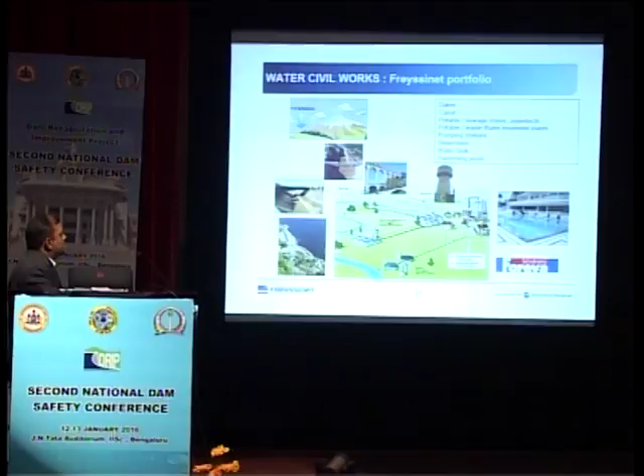Actually, we do a lot of civil works starting from dam, canal, then potable sewage mains, aqueducts, pumping stations, reservoirs, and also water tank and swimming pools.

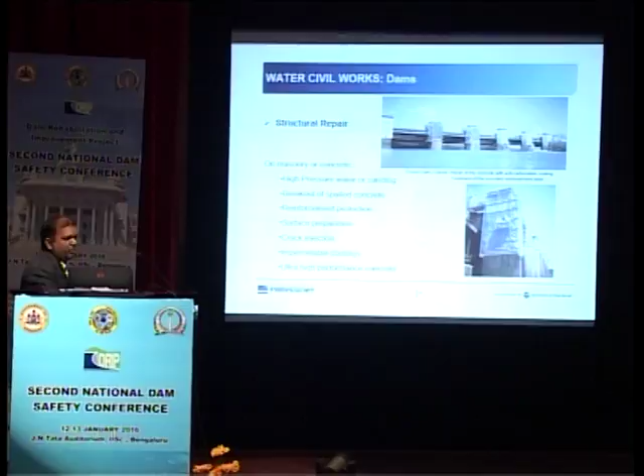So this is on structural strengthening. The important element we carry out is a new technology, dry shotcrete. Normally we do wet shotcreting in most projects, but we are introducing dry shotcrete for different needs, and also the application of carbon fiber reinforcement and jacking of dams.

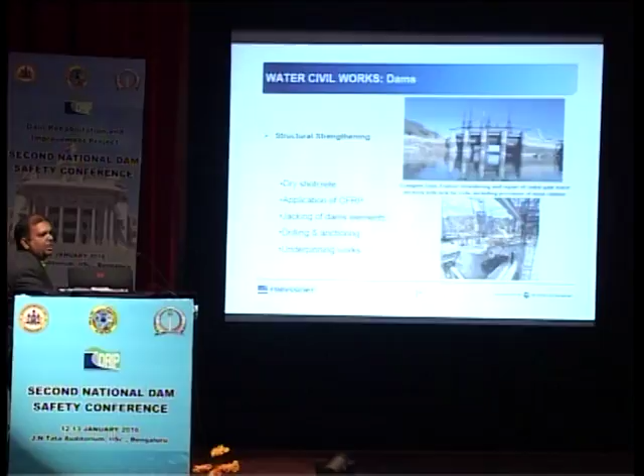Heavy elements could be jacked in the dams, like we precast elements outside, and that could be jacked using hydraulic equipment, and fitted onto the jacks in dams. And also we do underpinning works.

In upgrading of concrete structures, normally we precast large elements outside the dam, and also can do pre-stressing works, that is external pre-stressing, or sometimes a ground anchor, just to increase the strength of the concrete. This technique could be used even to increase the crest height of the dam.

This is one of the specialities, and we use hydraulic jacks to handle the precast elements. You can see here we got a frame, and using this frame, this element is precast outside, and this is being lowered.

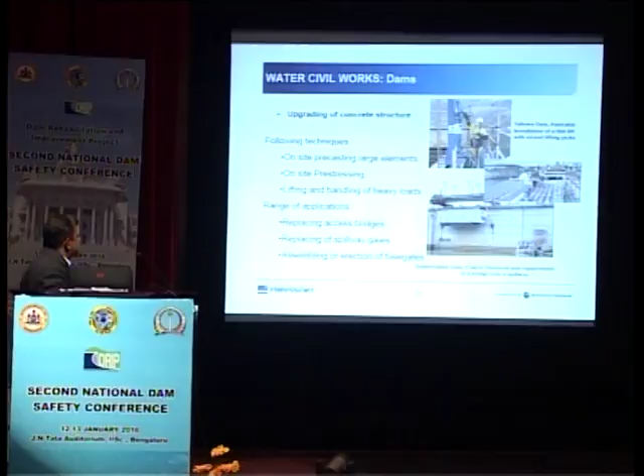We also do replacing access bridges, replacing of spillway gates, and assembling erection of fuse gates. Globally, we have done more than 30 dams all around the world, so we have a good level of experience in various aspects.

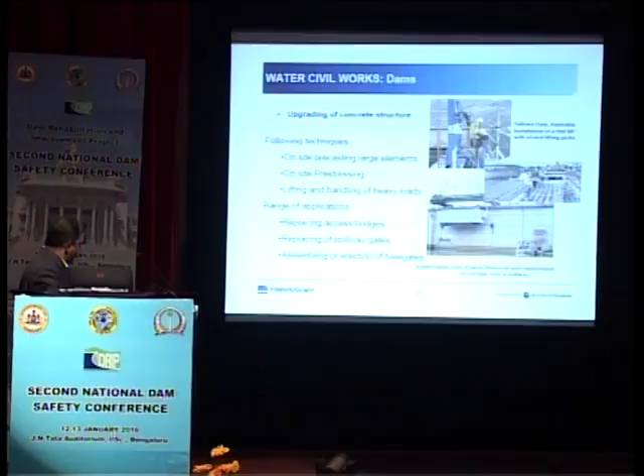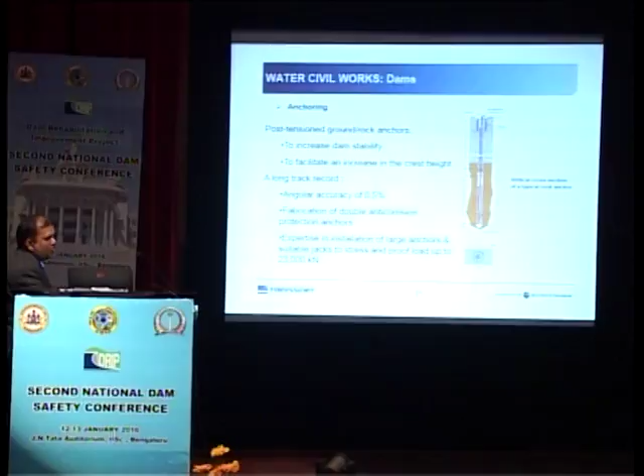This is one of the important credentials of Freyssinet, where we do the anchoring works. Using this technique, we can increase the height of the dam. So even for Narmada Dam, this can be one potential technique to increase the height.

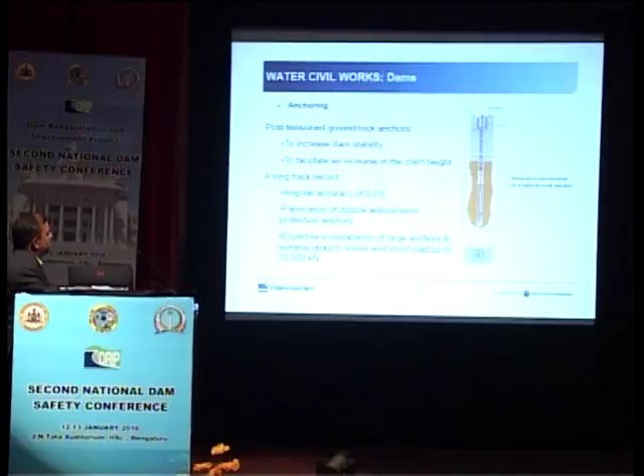What we do here basically helps us increase the dam stability and also increase the crest height. The drilling is the major concern, where we have to maintain accuracy of 0.5. So the equipment we use matters a lot.

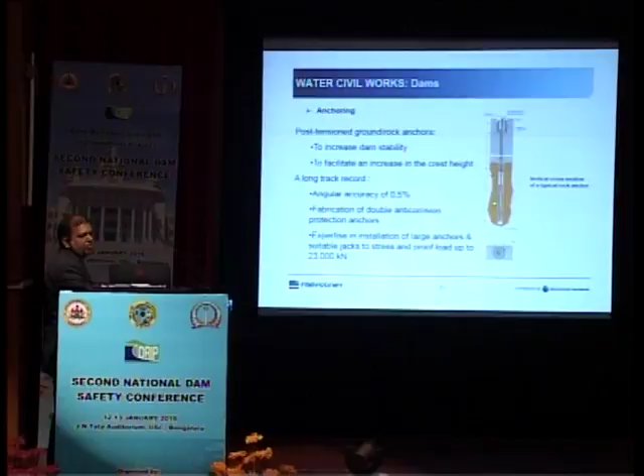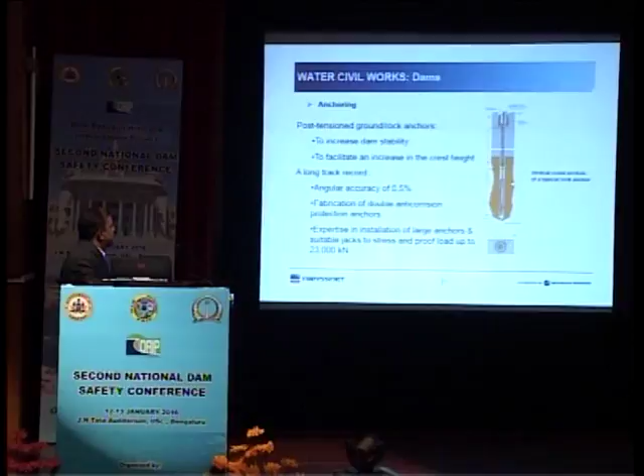Also the fabrication of corrosion protection, since there may be some leakages as it is a water structure, so we have to give emphasis on anti-corrosion measures. This is very, very important.

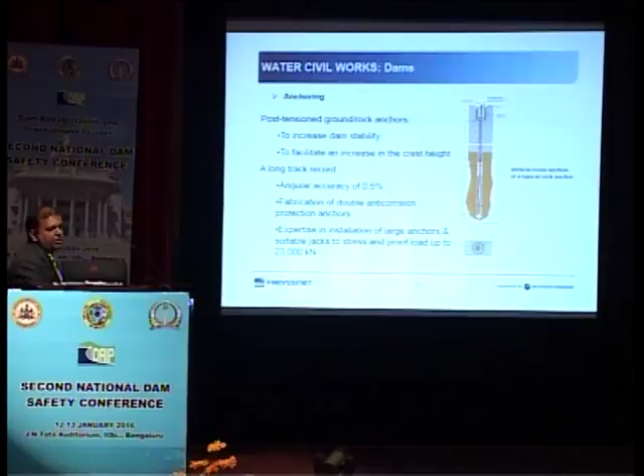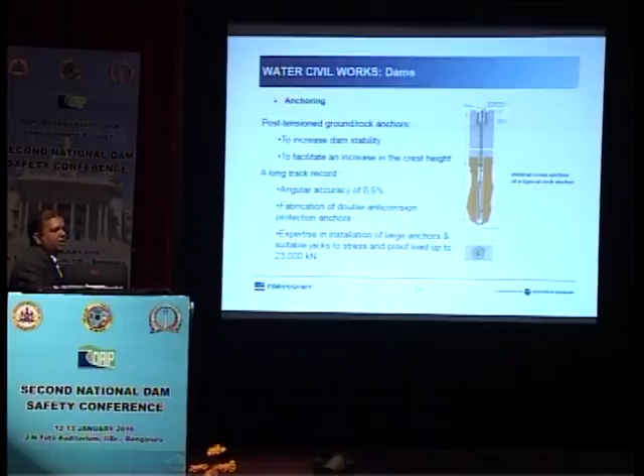We can do this ground anchor even up to 2,300 tons capacity per individual anchor. It's a huge anchor, requiring big machinery to handle. This is one of the important techniques adopted when we want to increase the height of the dam, and we have done more than 30 dams within 10 years, with vast experience in different fields.

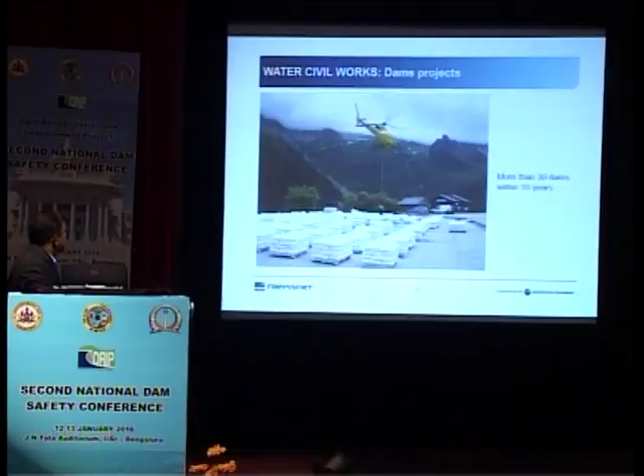Here mostly we wanted to emphasize the dry shotcrete technique. This is on masonry dam, where first we prepare the masonry dam using our hydro demolition machine. We have a specialized machine which works with high injection of water.

This prepares the surface using water. At around 2000 bar pressure, we can pump the water and clean the surface, giving a rough surface so that over that we can install the reinforcement, and over this we apply the dry shotcrete. Dry shotcrete can be prepared up to M60 or M70 strength, so greater strength.

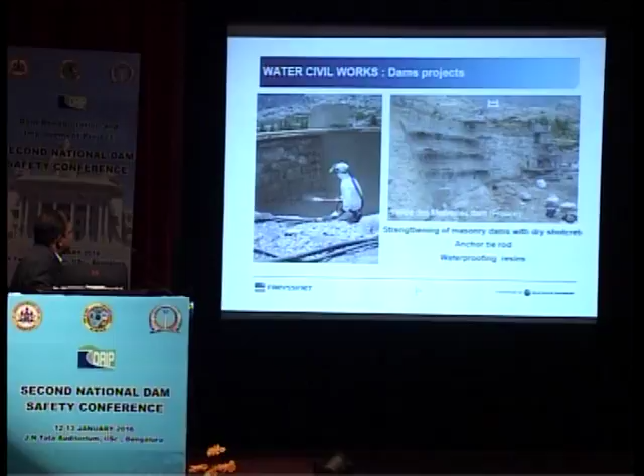In this strengthening, we can apply some tie rods also for holding arrangements, and waterproofing since we apply it. This is one dam in France, strengthening of concrete with dry shotcrete.

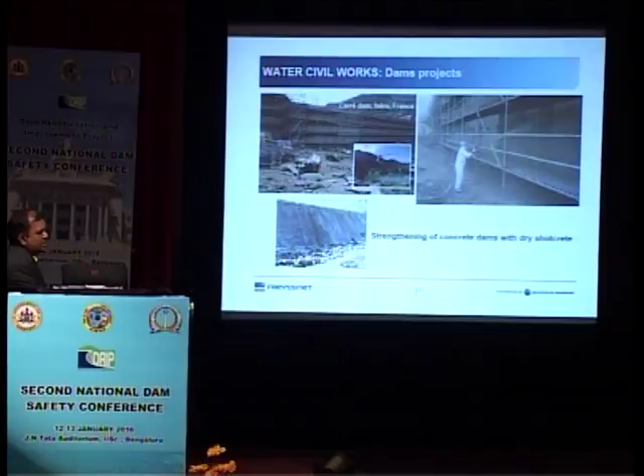Freyssinet extensively uses this dry shotcrete because of its strength, and also because of its monolithic structure. When we apply this dry shotcrete into the existing structure, it becomes a good binding, and also acts like a monolithic structure. We have proven this in several tests.

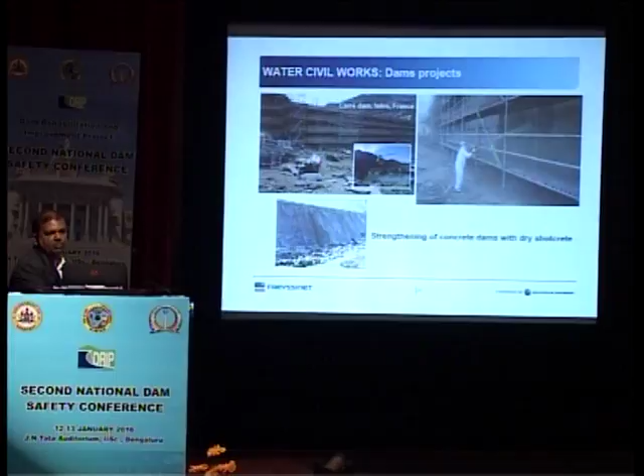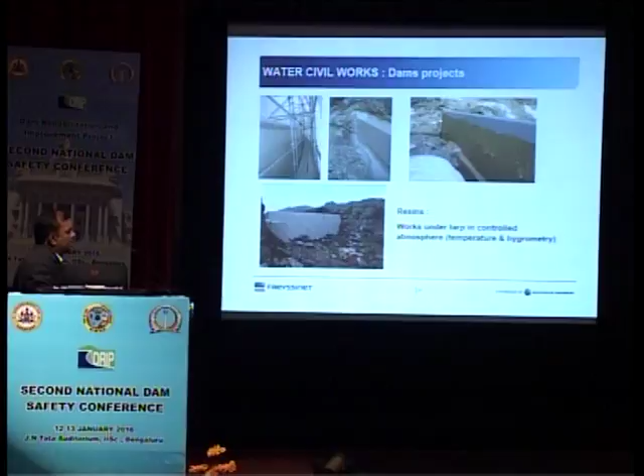These are all some resins under a controlled environment. It is important to work with resins under controlled temperature and also under a controlled environment.

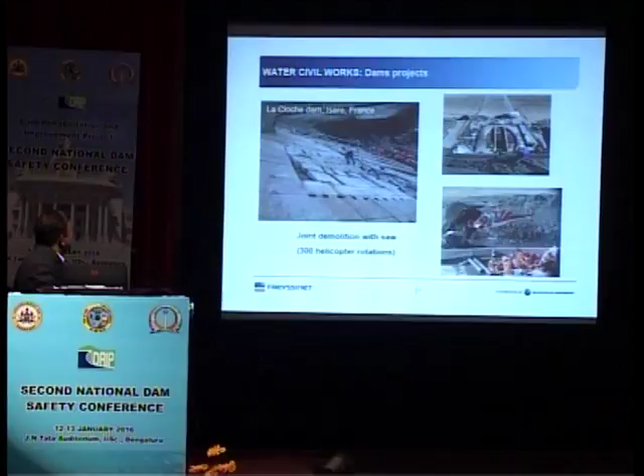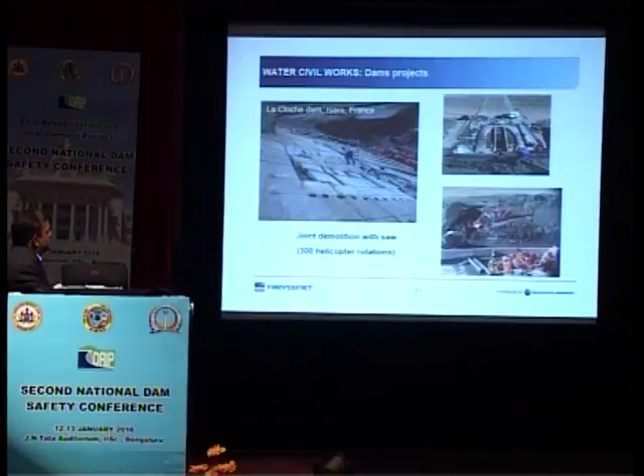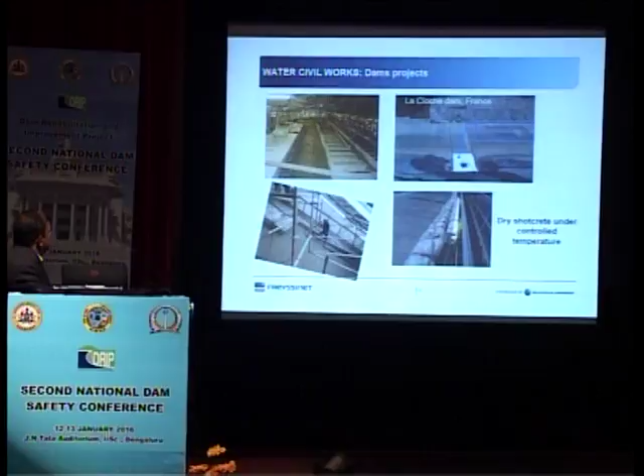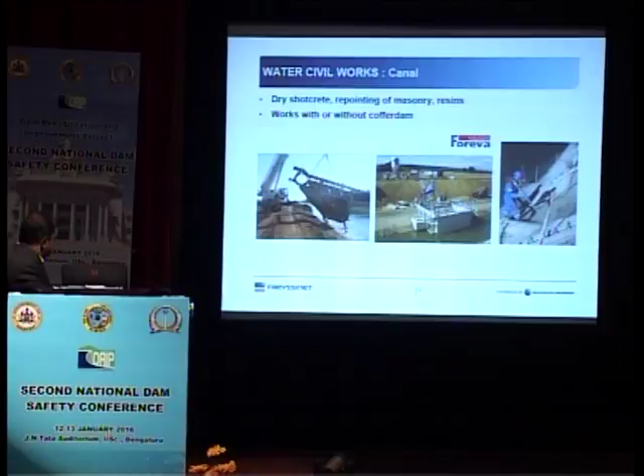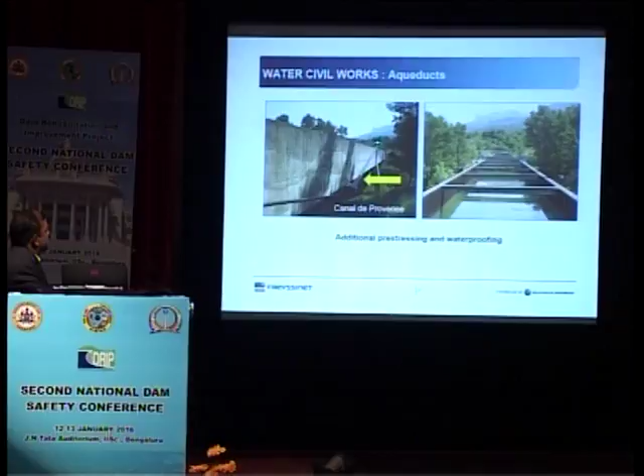So again, dry shotcrete has been used, under controlled temperature. Same project, this is for repointing of masonry and resins with or without cofferdam. These canals could be lined with this technique, and these are all some canal jobs which we did. For here we do some kind of additional pre-stressing external to the structure, and also waterproofing.

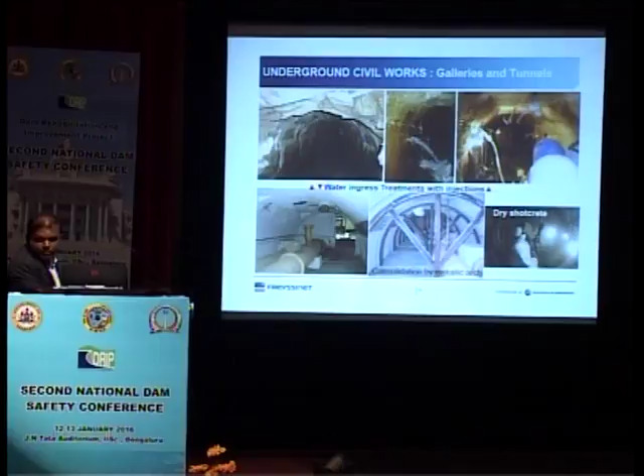This is one of the good examples again for dry shotcrete, a different technique inside the tunnel. The tunnel was earlier like this, then we used our frame system, first made a rough finish, and then applied this dry shotcrete concrete. This is one of the projects which we did in Bhutan.

So here again inside the tunnel we can do some kind of anchoring for strengthening purposes. It can be vertical upward anchoring. This is one of the very critical techniques to use, vertical upward anchoring with the combination of nails and also anchors.

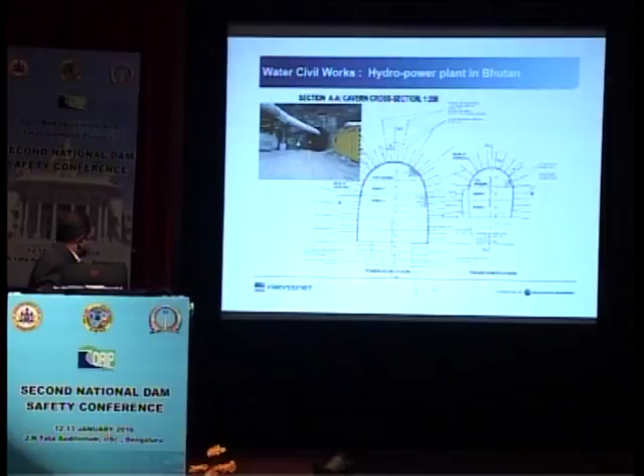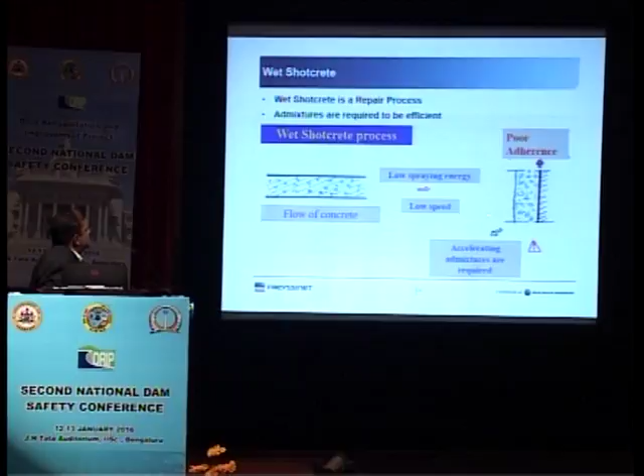In dry shotcrete, we have high spraying energy and high speed. So here if you see, the bonding between the original member and the applied shotcrete is very high. The bonding is high and it acts as a monolithic structure. This has been proven in various tests.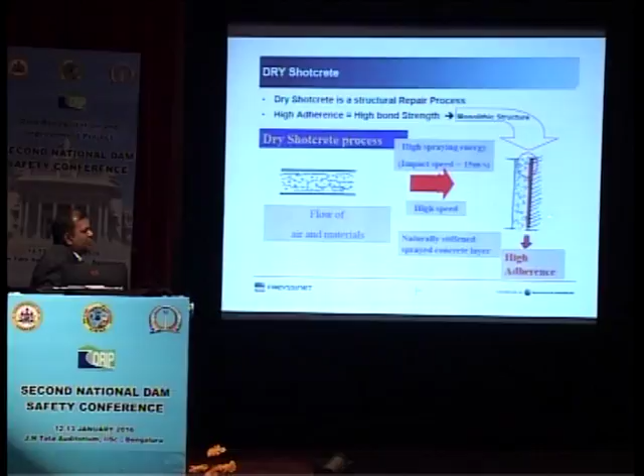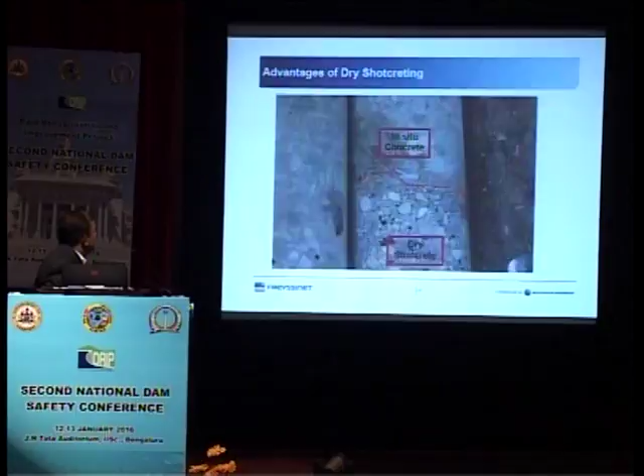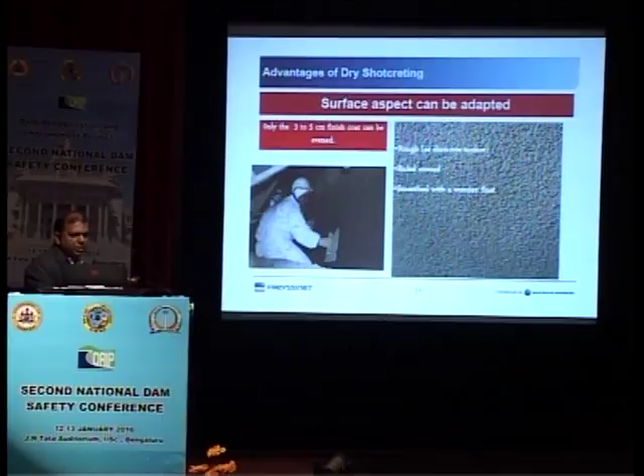I will shortly conclude. So this is on dry shotcrete, a very wonderful technique. Here we bring to the table mainly two or three techniques: one is dry shotcrete, the second is ground anchoring, and also hydro demolition technique. But there are various options. We can do it, but this is one of the options to improve the technique, and also we can do the combination of pre-stressing as well as ground anchor to improve the structure.

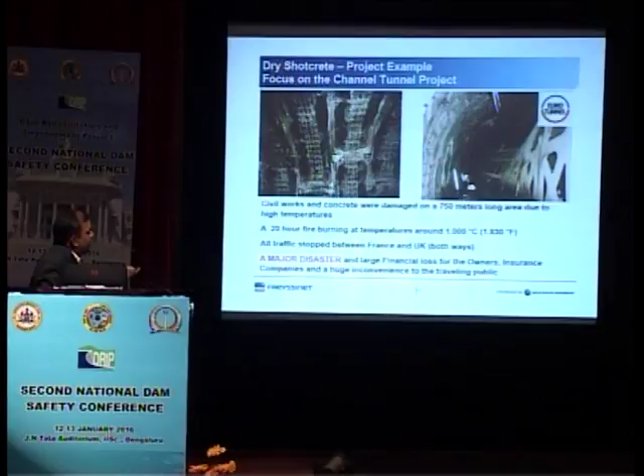So these are all some jobs which Freyssinet have done. This is one of the interesting jobs between France and... I think I would request you to kindly conclude because we are running short of time.

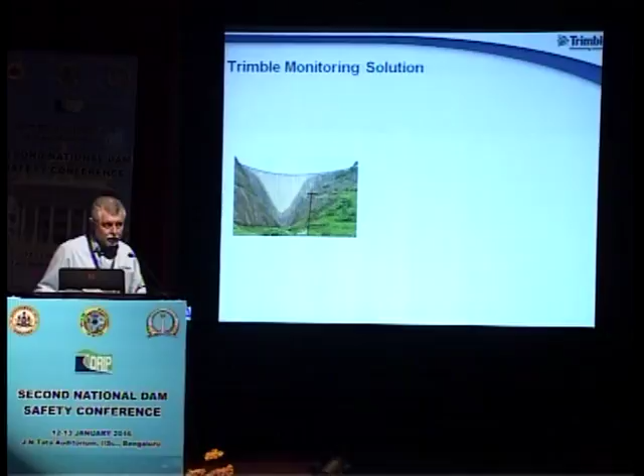It works as follows. We start with the dam, which is one of the structures we're going to be monitoring here in the DRIP project. We take the existing sensors which are on the dam already. Now all of the dams that we've looked at in the DRIP project so far have got sensors on them in various forms. We take those sensors and get them operational, and if necessary, we replace them.

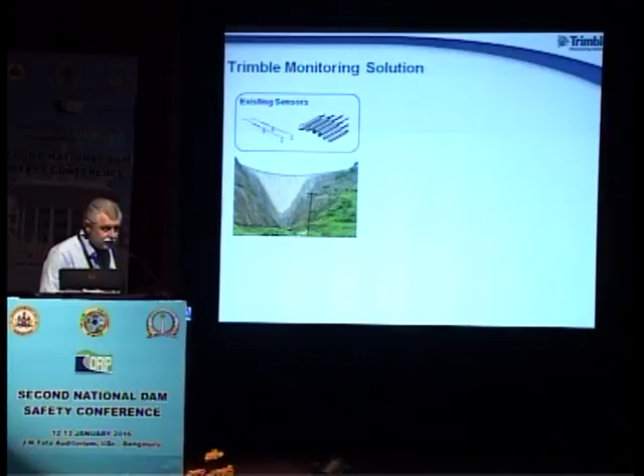If necessary, we just upgrade them. We can add new sensors to the dam. The typical sensors that we use here are GPS-based sensors, optical-based sensors, and seismic-based sensors, as well as data logger components which then are connected to geotechnical sensors.

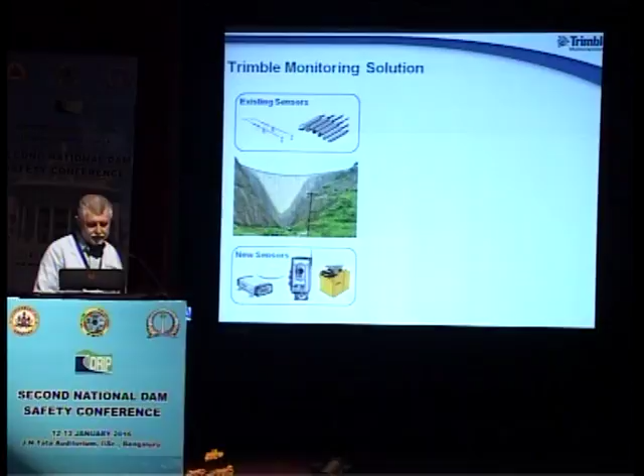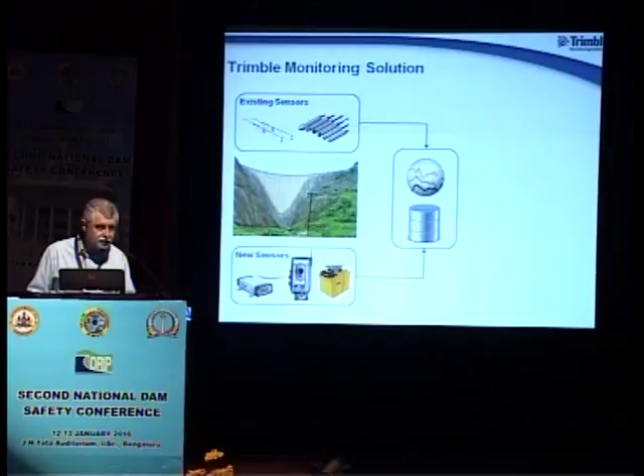So we take the existing sensors, we take the new sensors, we acquire the data from those, and we feed them into a software package. The software package has a SQL database in it, which is an open source database. The numeric processing that takes place in the background processes the data from the sensors, converts it into a data time stream, and feeds it into the database.

The information in that database is then available for analysis, alarming, and reporting through various forms. You can have it on your desktop, laptop, tablet, cell phone, etc. This is the overview of the basic system that we have, and we concentrate on measuring the performance of the dam.

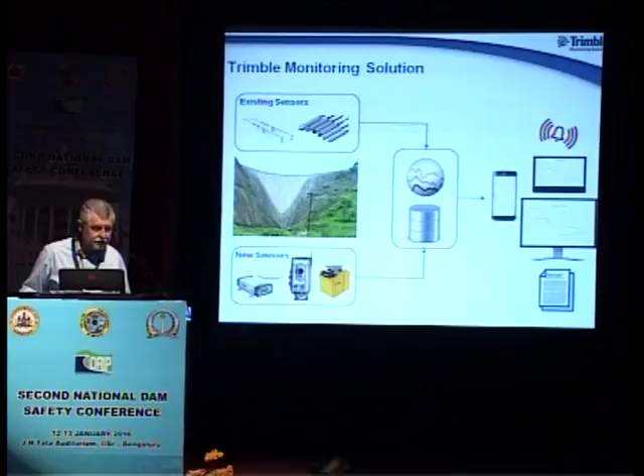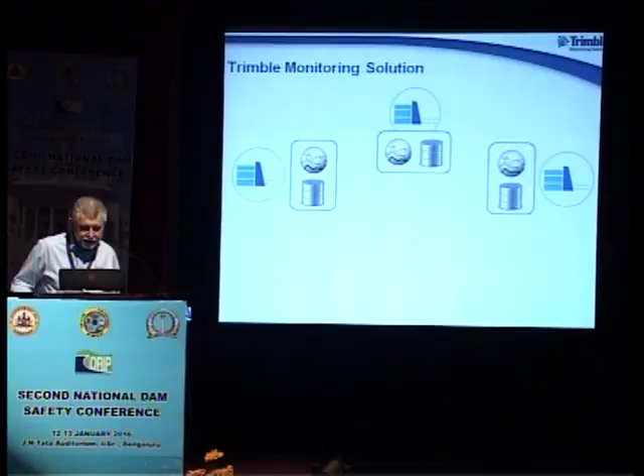We can multiply this outwards, so we can take a number of dams. We'll have a single system there, another dam, a third dam, and feed that information into a centralized control center. This allows us to have the performance of the dam monitored from both local locations as well as from a control center.

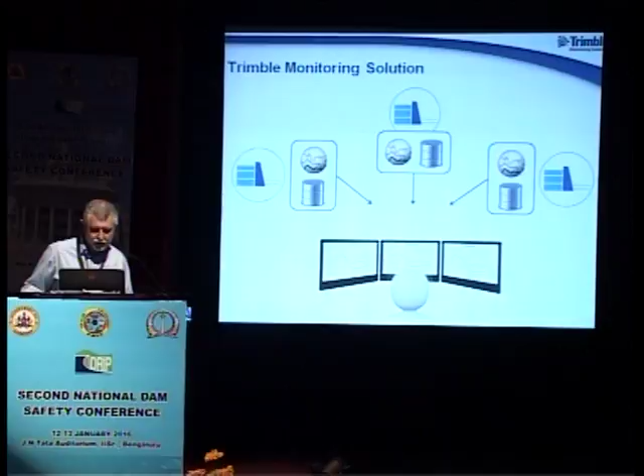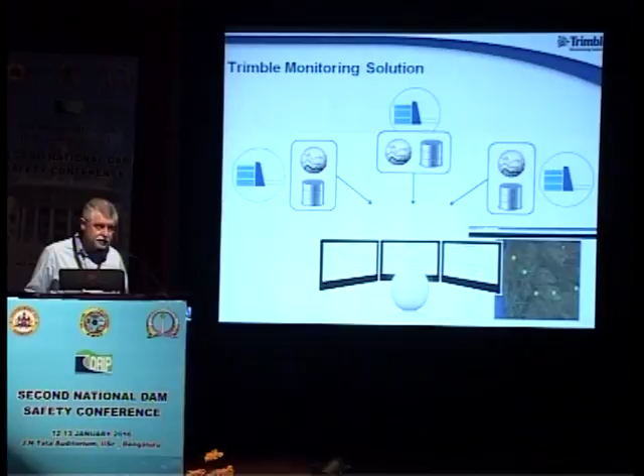This control center facility also has an ability to summarize the performance of the dams in a particular area. We use icons to show this. We have a single icon, for instance, showing the performance of a particular dam, and the color of the icon indicates whether there are any problems taking place on that dam. Selecting that icon will then allow you to go into the performance information related to that particular structure.

Now you can connect virtually any sensor to this system. I've listed a whole lot of sensors there for you to look at. But essentially, you can measure any performance parameter on the dam, around the dam, inside the dam, behind the dam, related to the dam. If it can be measured, we can capture that data and process it.

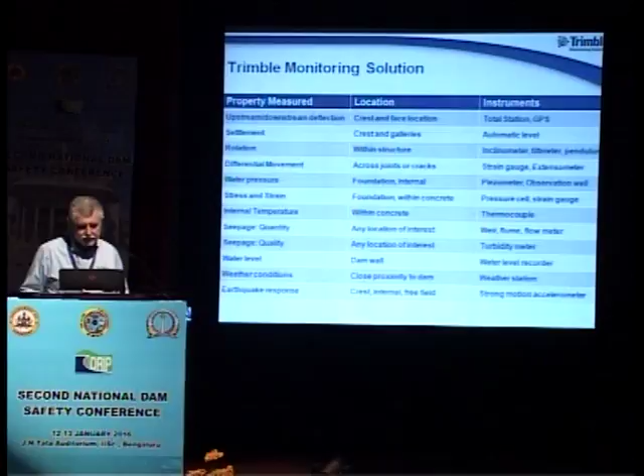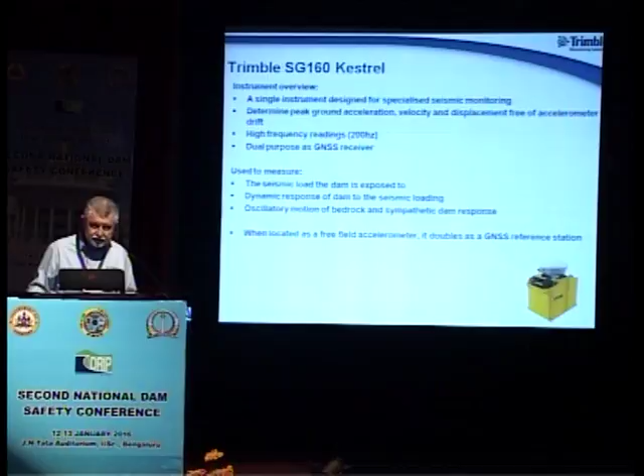There's one piece of equipment I'd like to concentrate on a little bit here. This is a new piece of equipment released during the past couple of months. It's a combination of a seismic sensor and a GPS sensor, and it allows us to measure the performance of a dam under seismic conditions, both microseismic and large seismic activity. The sensor allows us to determine almost instantaneously the effect of a seismic action on the dam.

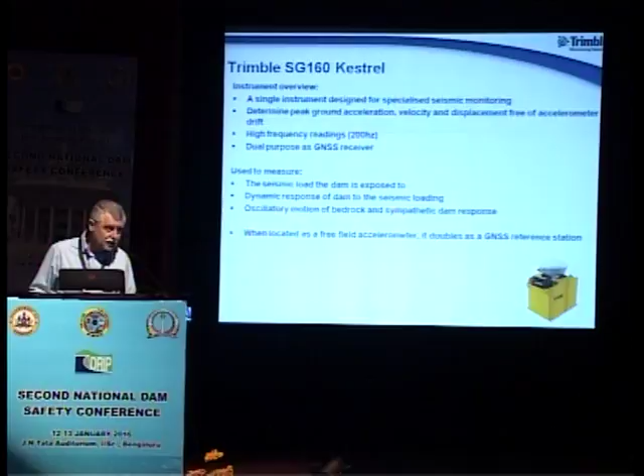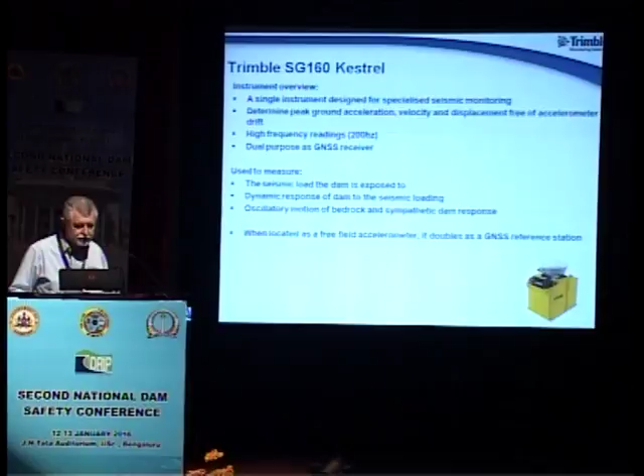This is a unique piece of equipment. There's no other equipment like this worldwide. It was in fact released here in India for the first time and is currently being deployed around the world. We have an example of it here, and our recommendation is to put it on all of the dams in the DRIP project area, seeing that India is a seismically prone zone.

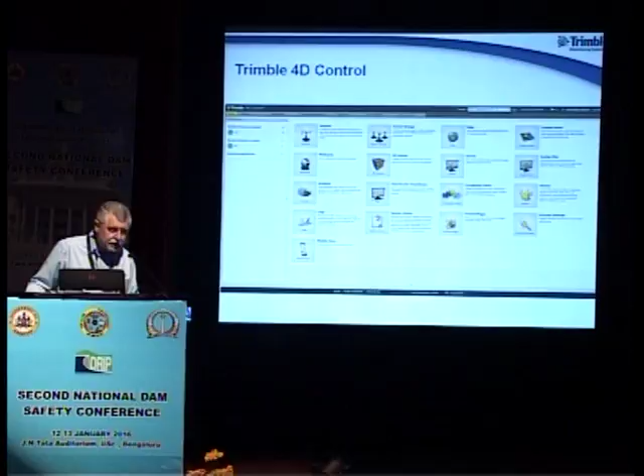Information that we get is available via a web interface. We've concentrated specifically on creating a web interface with our target market being a semi-technical person, so we've really relied on intuitive actions on this web interface. It has full functionality, all the functionality you would expect for an analysis program. I'll just touch on it briefly here since we have a short presentation time.

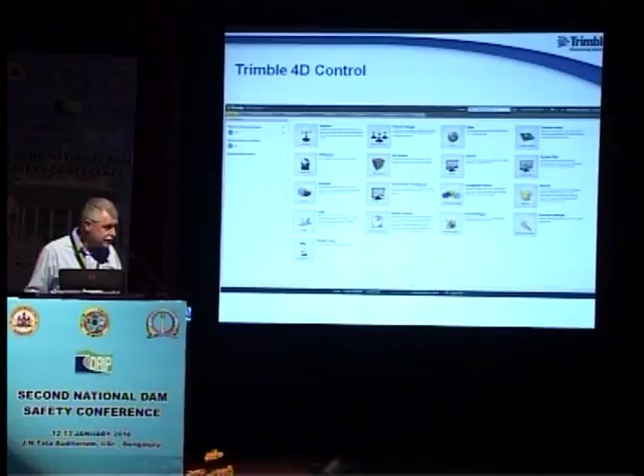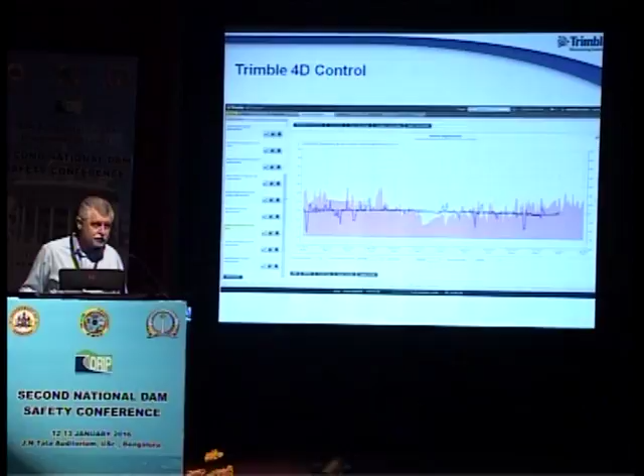We obviously can chart. The most important thing about this charting capability on the web interface is that we can use Boolean comparators and compare data from completely different...

Okay, this thing's now done its thing. It's gone on strike, it's run out of time. Fix it if you can. You can. This is why we don't do a live demonstration with installations. It's waiting for tea time. Another two minutes—yeah, I think you just reboot it. Captured from an installation we've got operational. I've actually got one charting up in the booth.

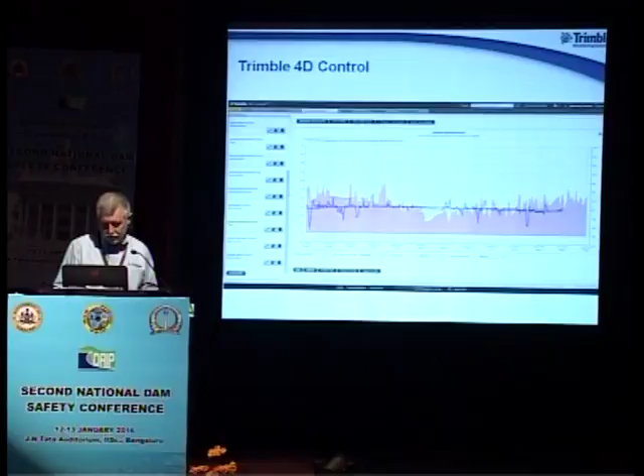This shows the performance of the dam over a period of a single year, and you can see a very nice example of the cyclical behavior of this structure.

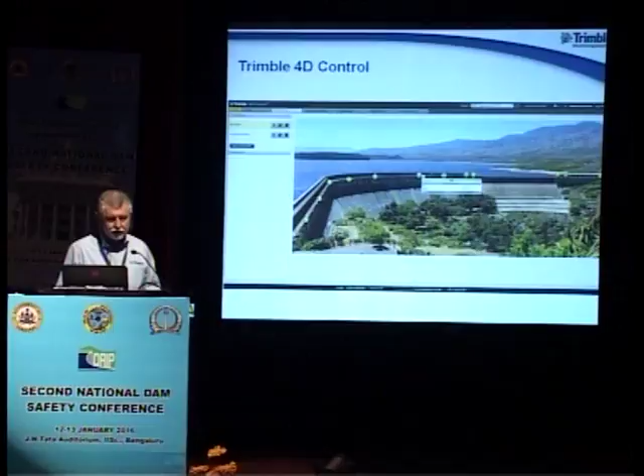The information can also be provided in a very intuitive graphical format. You can see here where we have icons representing the sensors. The color of the icon represents the state of the sensor. And if you click onto that icon, you can get information out of it in a tabular format or a graphic format with a chart.